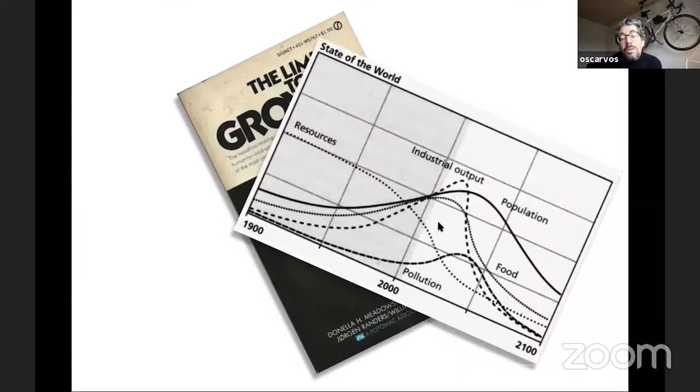Because we need to act, and we know it - we've known it for a while. The Limits to Growth - maybe people haven't fully read it, but know of the Club of Rome and this publication and their forecast. Not a truth, but a forecast of what will happen if we continue living like we do.

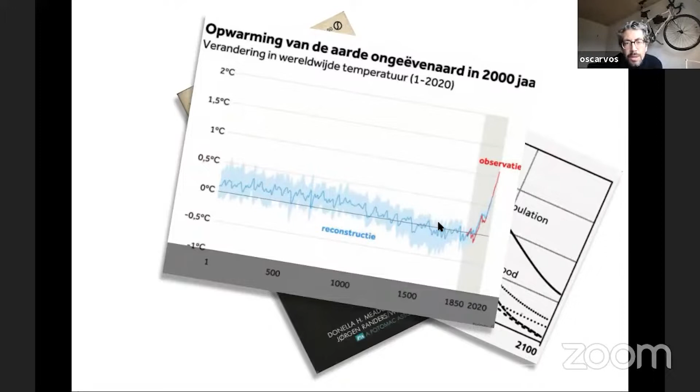By now we know better than before how urgent it is that we start transforming our way of living, our society. But at the same time - that's the climate part - there's a huge pressure, not only in Amsterdam but on a global scale, on inclusiveness in cities and affordable housing in general. So the right to dwell is important, and again we see in Amsterdam families moving out of the city, which is ultimately bad for the city and the municipality as a whole.

I'll get back to that later. This is a very important start to the lecture, but I want to move on with an introduction about me and about our office. It's not just about me - my office shapes who I am and what we do together.

I'll go quickly since there are many slides, but I really want to show you our first project, Dutch Mountain, where we had a huge ambition on sustainability - still getting to learn what that would mean for us.

We used local materials - here you see the local wood from het Goois Natuurreservaat. We built an energy neutral house, half underground; you can see the solar panels. But still, of course, there's a lot of concrete in it. You could say that's key because we were building underground - fair enough, but it still itches a little.

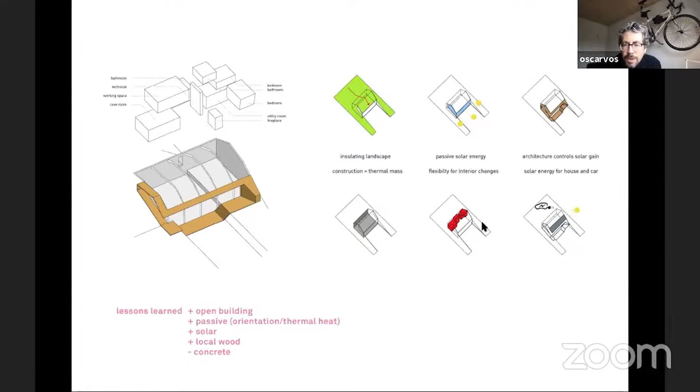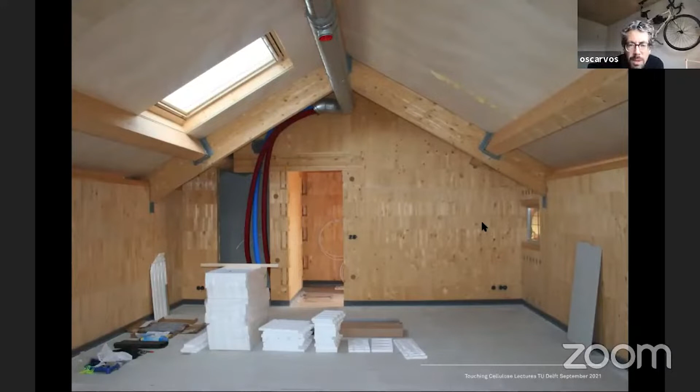So we moved on, researching what kind of structural materials or structural timber you could use for building houses. This is my first encounter with Steko. It's an artist house close to Belgium. We built it. It's a beautiful material.

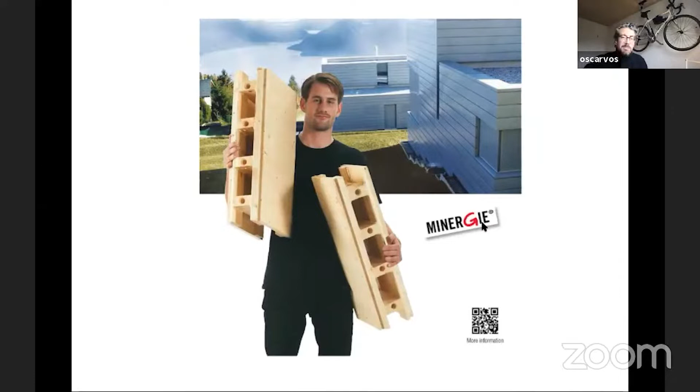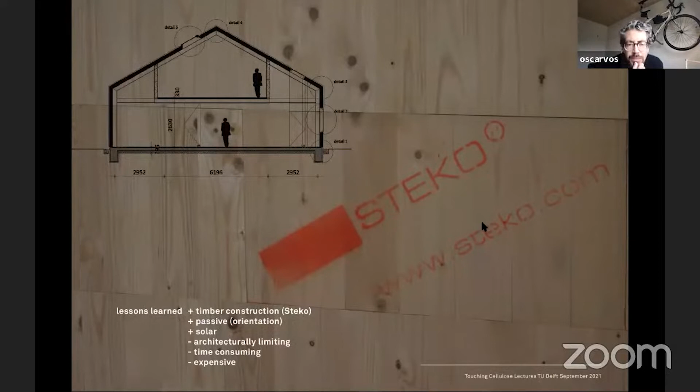You can by hand stack modules, but it's still learning by doing. It's limiting in its architectural manner, it's time consuming, it's expensive, but it is a timber structure.

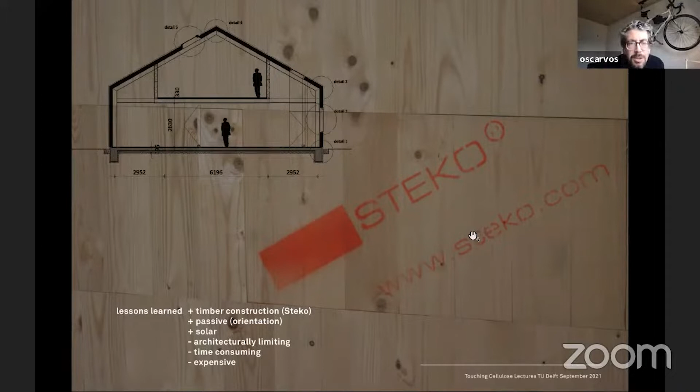So that was the next goal for us, trying to be as sustainable as possible in that sense. We try to do that in our public buildings. That's a big challenge, still lying ahead of us. Introducing as much timber as possible, yes, but there are still structural and sound demands which end up being a huge challenge. We keep on learning by doing, but we want to do better.

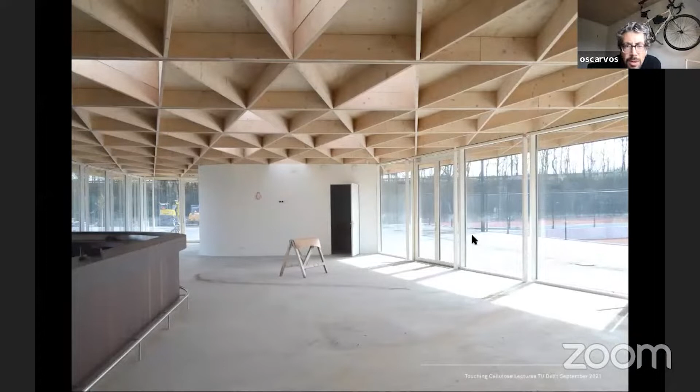But we try to introduce timber in different ways as much as possible, LVL kind of structures, and where the biggest impact is - I will get to that later - is in housing, since that is a bigger part of our construction in the Netherlands. So if you want to go for impact, you should do that through housing.

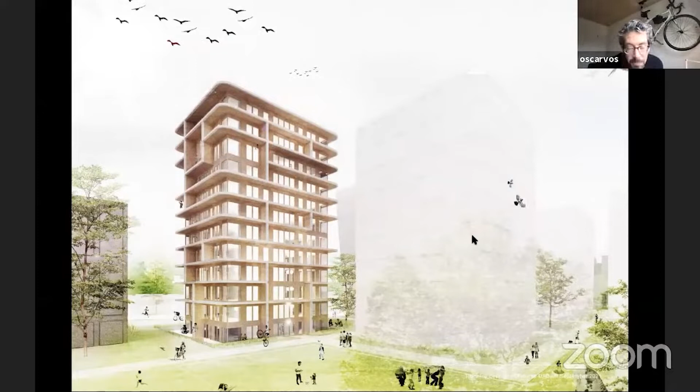This is a project which is still not built. It's a very complex procedure, but the design is finished. It's a building in Westerpark West. It's 12 layers, where we call it a sort of Tetris game, as you maybe saw here.

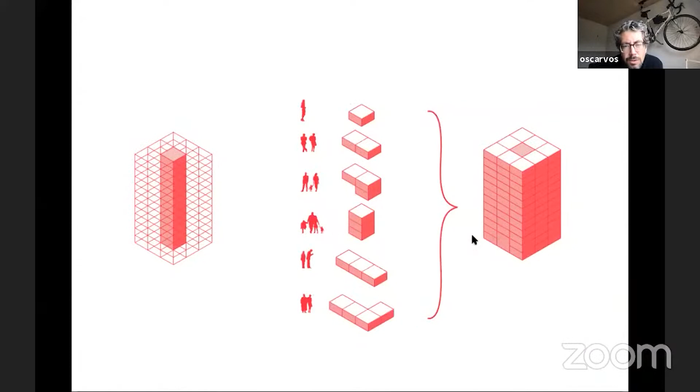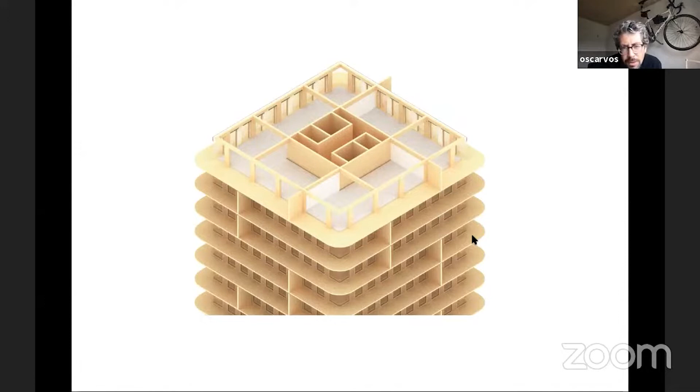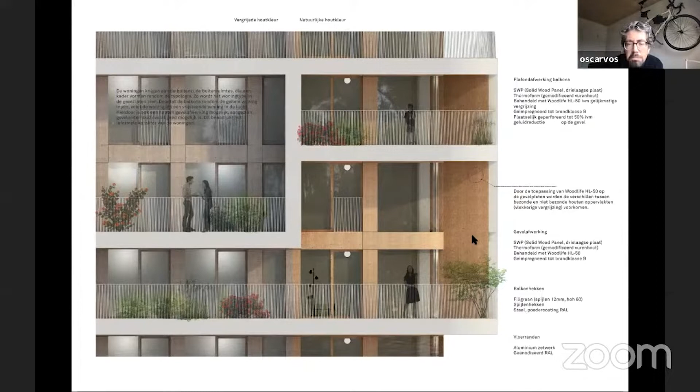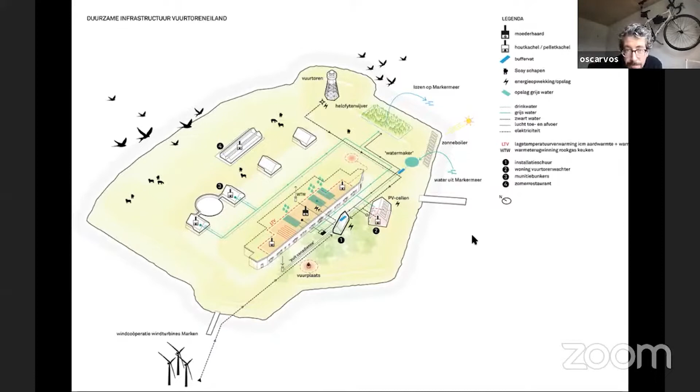We did a project in Amsterdam, Vuurtoreneiland, just to show you what you can do with wood. Yes, I'm going through this, but it's an amazing project. We actually took up the whole island in a new energy system, which you can't see anymore.

Going through it, I would recommend you going by boat to the restaurant any day. It's beautiful.

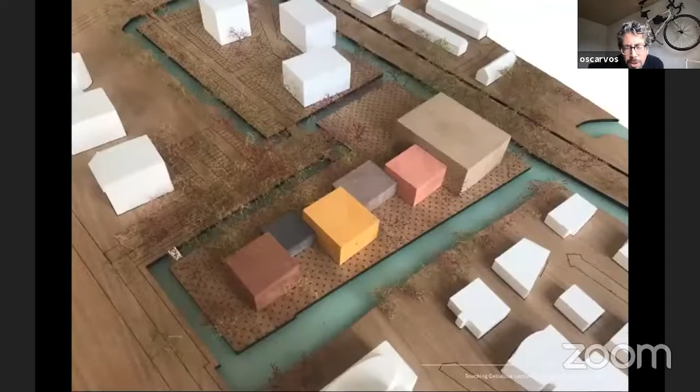A project we're working on - it's a school just above Amsterdam. It's a school for kids who have several different learning problems, physical as well as mental. So it's an important building for us, and everybody agrees that it should be built in wood, since that is the best way of creating an environment where they can be at ease and be themselves.

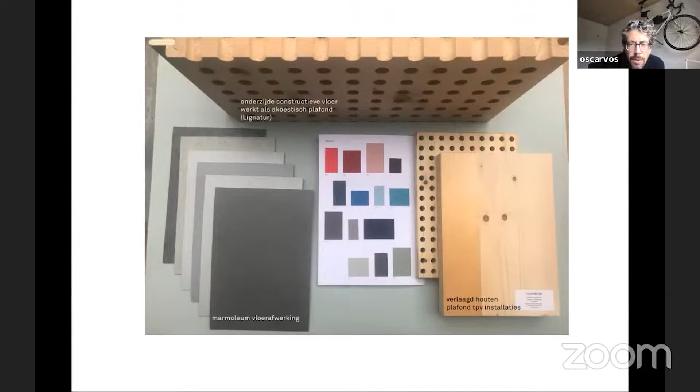So we've researched it - it's a combination of different timber structures. This is Lignatur, a Swiss company actually, the only company which has this product. It's a beautiful product where you can integrate everything, every demand you have, every performance you want a floor to achieve, where acoustics is really important - you see the Schallschutz.

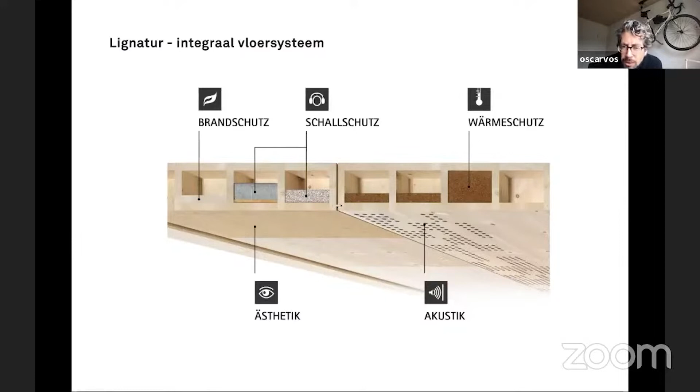You need mass in a floor to achieve that acoustic performance. So you could put it on top, but why not integrate it in this hollow structure? You can also integrate acoustical elements. So if you don't have a lot of duct work, for example, you can use those floors.

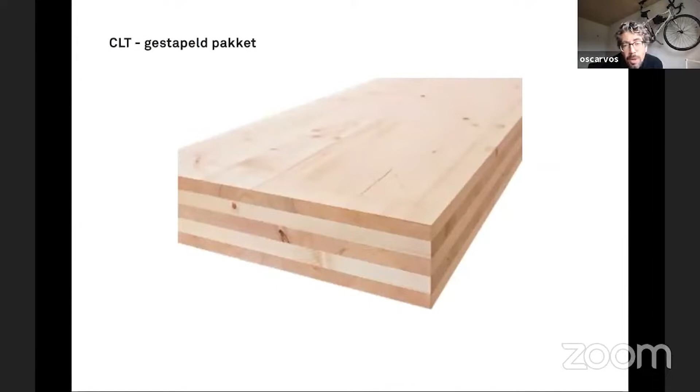But otherwise, we use CLT in other parts of the building, which everybody knows the term. It's funny to show, but it's going around so people may have seen it - it's amazing to know that the concept of CLT was actually patented in 1923, by Frank J. Walsh and Robert L. Watts. The thing was they didn't have the production techniques to scale it up properly, but the structural concept was there.

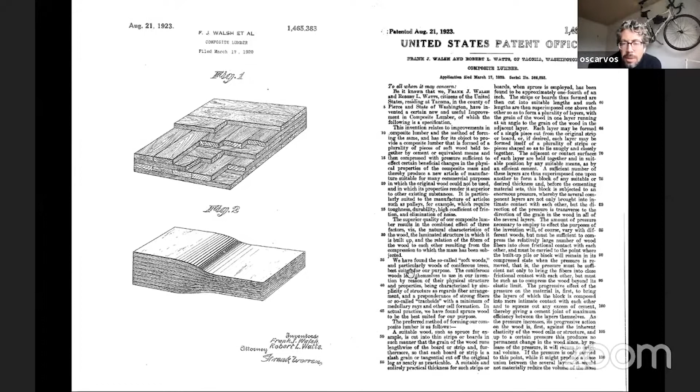We are happily now in an era where we can and we are scaling up, and it teaches us different ways of using a material. Every building, roughly every typology, could make use of different ways of structural detailing. So these are prefabricated - I call them double T elements. The KLH, a company, makes ribs.

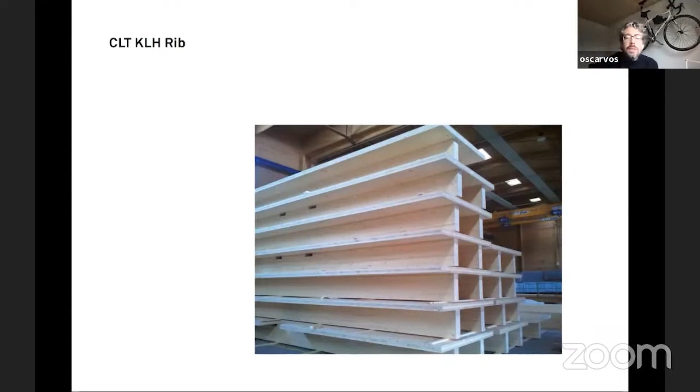In some cases, these are amazing products to use if you have big spans, but then again, they're also quite high, so you need enough floor height space. The same goes for LVL beams, they're structurally amazing, but you need height, though they're very slim.

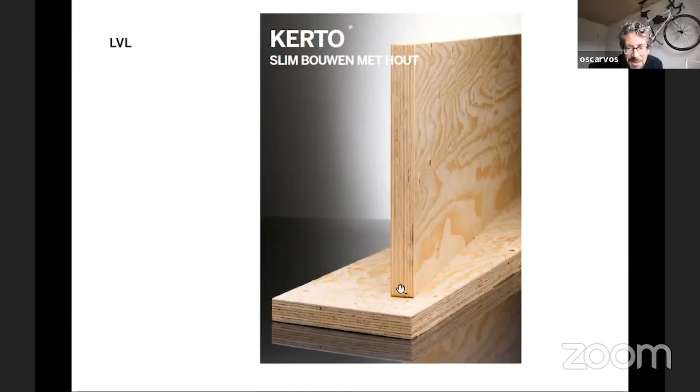I'm just showing you what our learning curve was, you need to research all the different opportunities timber has. The bigger part we probably know by now, but it's still not common enough, so I also see it as a sort of mission to tell everybody what the opportunities are, and to learn from others, of course.

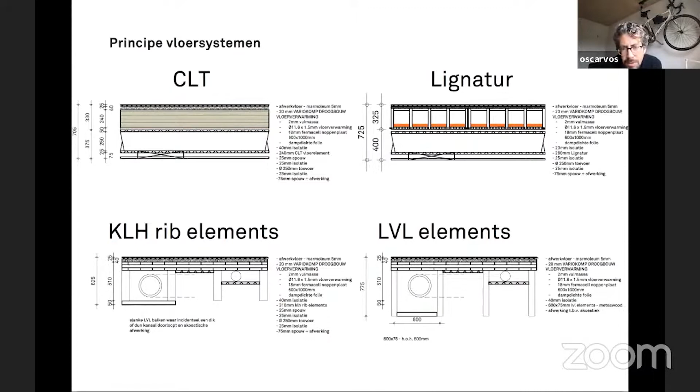We put different typologies next to each other with their pros and cons, that's what we do in every project. And funny enough, I noticed that in our practice we communicate more. Structural engineers are key, of course, but we communicate basically more with the suppliers, or the structural engineers of the suppliers, to have a very quick feedback loop on designing, and it's very learningful for us as an office and for myself.

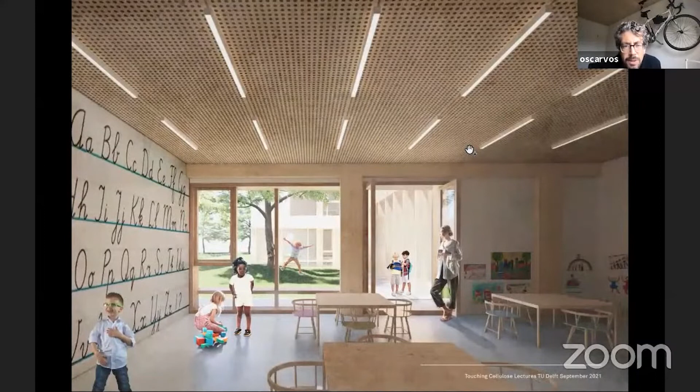And in the Speelleerplein, as we call it in the Netherlands, it's a sort of Swedish model, I shouldn't dive into that too deep, where kids can play and learn together. So you create a space which is challenging to move and to learn at the same time, really combining those things.

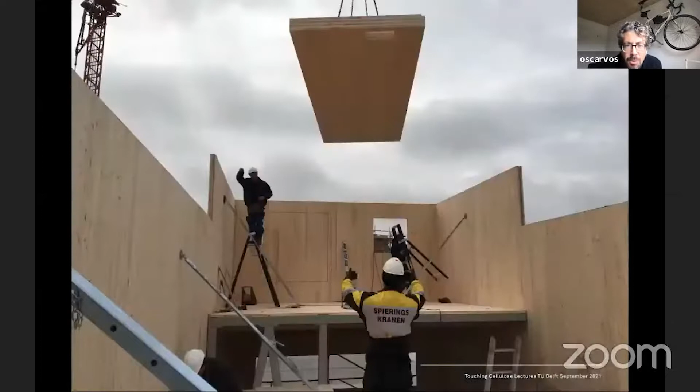I move over shortly to my own house, where, because a few years ago we hadn't built with CLT yet, I needed an experiment. So I did the experiment on myself.

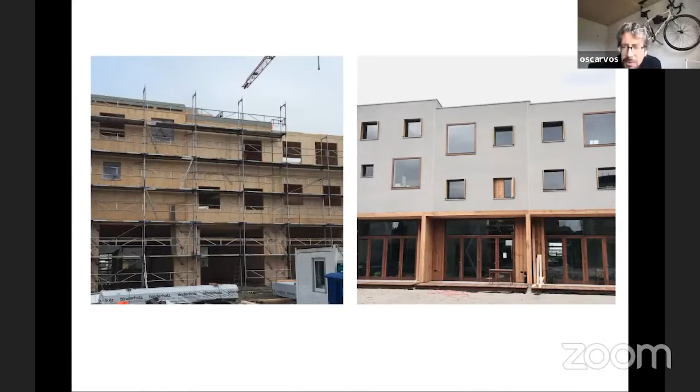Built with a few families a co-housing project in the northern part of Amsterdam, where I also wanted to challenge myself and my neighbors to create affordable CLT houses, although spatially inefficient, but basically pretty affordable. That means you have to design listening to the material.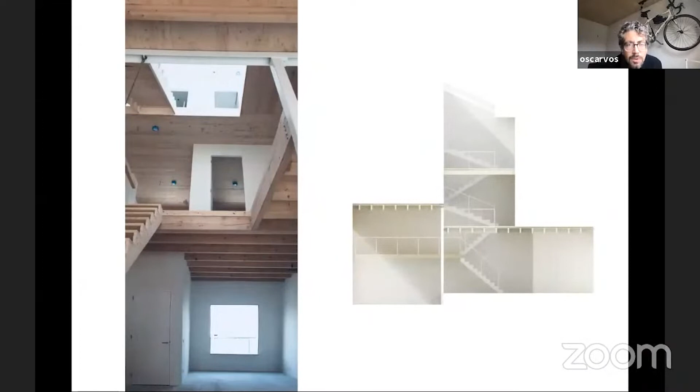Then again, if you need some proper space, you sometimes introduce some steel, but just to show you there are projects enough, of course, which is growing the amount of projects using structural timber in a new, productive way.

And it's easy done. These were my two daughters, sorry for showing this, but we enjoy playing kapla, and actually it's really inspiring playing with that. You should do it sometimes.

So I move on to another project, which is very new, very fresh for us. It's a really tiny project, 100 square meters, on a very special small island just above Amsterdam. The cool thing is, because it was on an island, we had to challenge ourselves to build very light, very smart. So it's 100% wooden, well, HSB as well as some CLT combined house, which could be transferred on a small boat over the water.

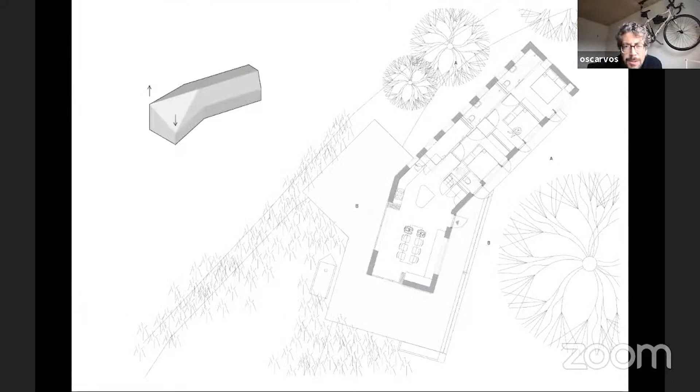You see, it's totally, the roof as well is totally covered with this durable wood.

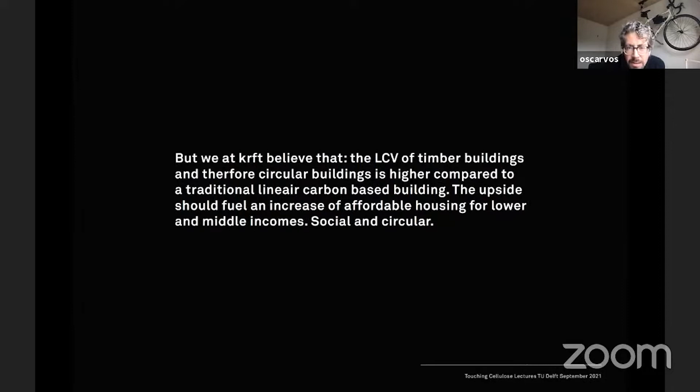Creates a beautiful place. But again, going back to the main theme about the fact that timber buildings and the upside of the life cycle value should go into something valuable, namely affordable housing.

So I want to move on to talking about a case study research, Social Circular, we are doing with IGG Bouweconomie, a building economics and building cost calculation office, and Copper 8, specialized in circular business cases and circular economy.

Jordi van Laar at IGG is an amazing guy who knows everything on circular business cases. To give you a more detailed list of urgencies important in this research, we really want to focus on the Netherlands and on the shortage of affordable housing, and really want to show, talk or debate on the fact that we should get rid of the cradle to grave mentality in housing specifically, but also align with the national agendas for the grondstoffenakkoord, the resources, climate, and transition agenda.

There is an agenda moving from linear to circular. We want to achieve 100% circular building economy by 2050, which is a serious ambition, but yeah, it should be possible.

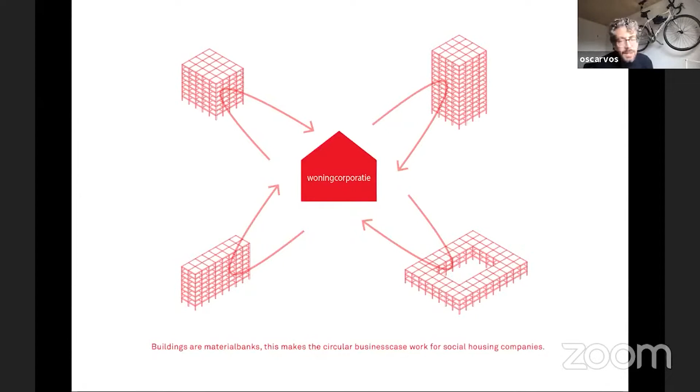Social housing companies own and keep owning the building itself for the total lifespan. And therefore you see happening that social housing companies are really interested and keen on transforming their business case. It's difficult since they have a lot of property which isn't circular. So it's a huge challenge, but everybody can see that the business case makes sense. We'll get back to the business case later. It's maybe not about designing, but a good architect, I think, is also very aware of the business case.

We say that for us, making a circular building also starts with some design principles, which is, of course, the Stewart Brand approach of having the 6 layers, which have different life cycles. Take the site, it's the longest one, and you can imagine all the other ones have different life cycles. I'll get back in the scheme on that later on.

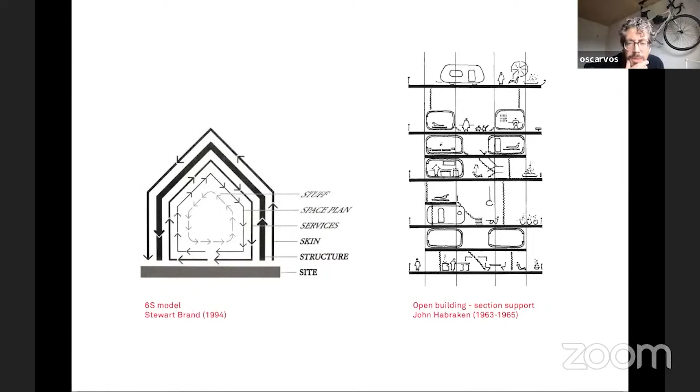Overall, in our whole office, we are very aware of the opportunities which open buildings have. It might not always make sense, but in general, actually, definitely it makes sense. Even the debate on, okay, does it make sense in housing itself? Because those houses tend to change hardly.

It does make sense, of course, to make a structure which is open and adaptive anyway. And what I told, we start always by checking, can we build with timber? Let's make it simple. If not, can we work with materials which are reusable? If not, can we work with recycled materials? This is as if it were such a simple step-by-step thing, but to give you a short insight on how we try to achieve the best or the lowest footprint and how to start in a project.

So this is the Stewart Brand scheme made concrete in 50 years. It's not a lifespan. Well, let's call it a 50-year lifespan. It's a bit of a traditional approach to 50 years, but anyway. And you can see that, in general, looking to the business case, you say, okay, the site is endless in that sense.

So it's the 50 years, as well as the structure. But it starts with the skin, where you say, okay, so I'm talking about the cladding or the outer layer of a building, which has to endure quite some things. It might need maintenance or changing elements after an update after 25 years. So halfway through, could be earlier, could be later, but this is a principal scheme.

And if you talk about the services, it's slightly more often. Now, spatially, it's about the function. So function changes. That's where the adaptivity of a building is key. Might occur way more or way less than what's happening here. And the stuff in it is separated really from the building, of course.

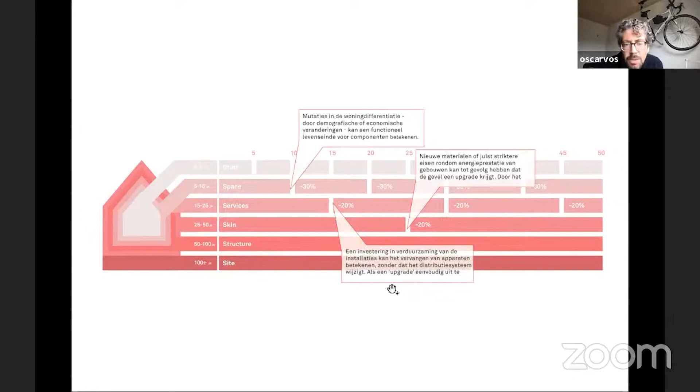Well, that's the same as this for skin and services, just to give you an example. So I think I have to be aware of the time. I think we have until 9:30.

The case study is on, these are two social housing blocks, and we call it framed as a concept. So we work from a spatial framework, which is exploded, shown here, so the demountability, the losmaakbaarheid, as we say, is a beautiful Dutch word, is shown by elements. And it's specifically important to imagine having this strategy in social housing, because they could change over to other projects.

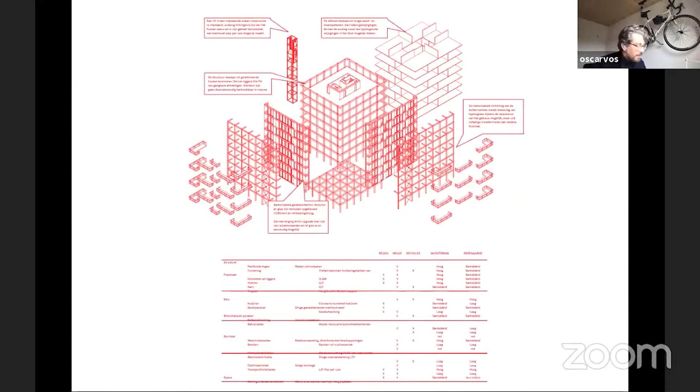And they could store it, but they could also just change out different materials throughout different projects, which makes it one big ecosystem in itself. Then by design, making it smart means adaptable, which means as free as possible floor plan.

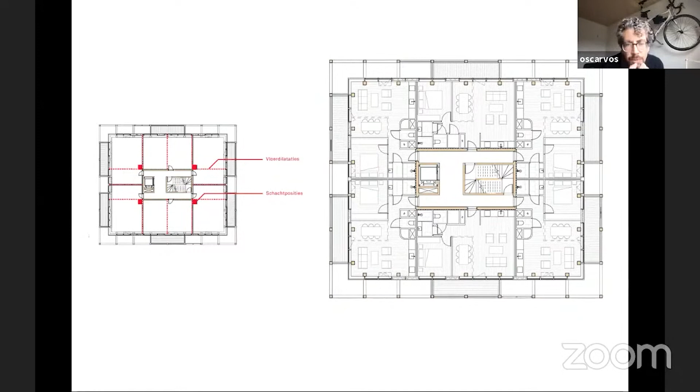Which is difficult because you have small scale houses. So you have to be aware of different possible sizes of elements. And you need to be sure that in your main structure, that's already a given, that you don't have to make big changes in your structure by achieving that. Pure logics, but anyway, I'm telling.

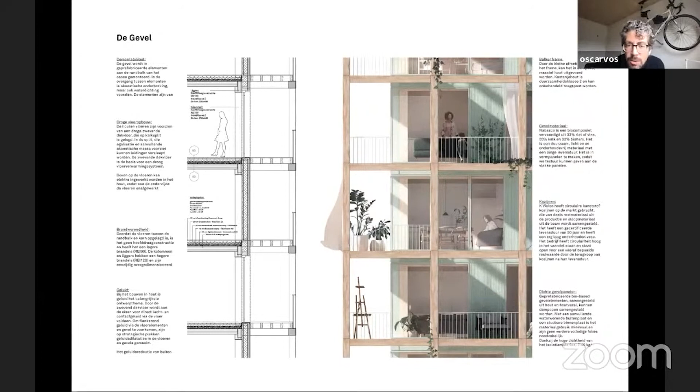And to get to the digits, Jordi van Laar made this based on the case we did. You have to start with realizing that if you make a proper circular building, then you have to be aware that the separate elements or modules need a certain rest value the moment you have to update it. So if a facade element needs updating because performance needs to be better, for example, it should have been designed in a way that it could be taken off in different elements.

The beauty of timber structure, which is why we try to align those things, is that in general it's easy and makes sense to have dry connections anyway, which makes remountability easy. But you can also assign different rest values to different elements.

If you start calculating a model over a certain lifespan, what we try to show, without going too deep into it, is over a 50-year lifespan, what is the value of the real estate? It's important because investors are also now starting to realize that if we build something now, we need to be aware of its value in 50 years, and thus we have to build a circular building.

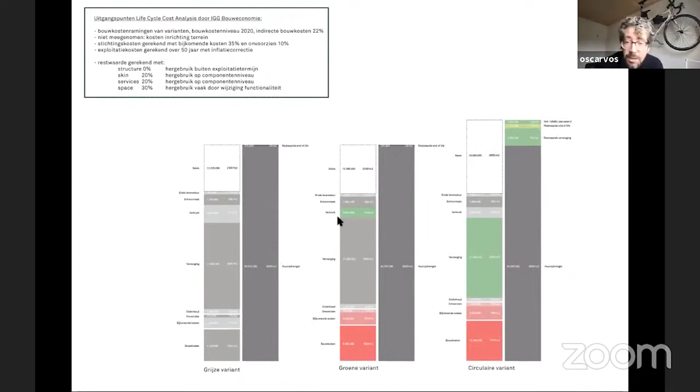That's the narrative we want to tell, because if you see this graphic, it shows the traditional concrete-based building in gray, which might make sense in the beginning. It's the challenge we always have as architects, trying to prove that the initial investment is not key for a proper long-term business case, because every jump in this graph means a certain life cycle of a certain element, and if it loses value over time, you lose value in your property. But if the elements you update keep a rest value, the overall value of your building relatively grows, so you also lose less money in the building.

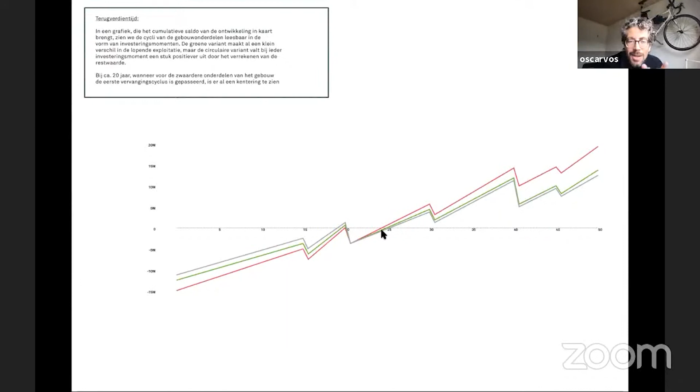A beautiful example is the city of Rotterdam, which is already acting on this. They have buildings which are circular enough, and their conclusion after a few years is that they have less maintenance costs, and therefore they say, okay, then the rents should go down too. That's where I want to go towards - if the business case is smart and everybody's happy and everybody earns enough, then affordability could also be a goal to achieve.

We're moving forward with this research now, so you will be hearing more of that.

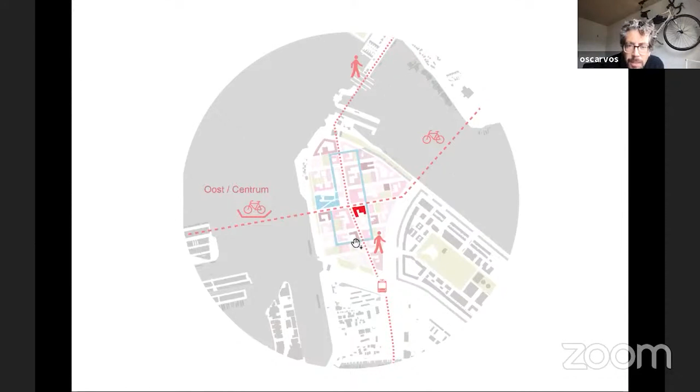In general, it's a stack of 8 blocks to create a smaller korrel, a smaller block, which fits in a more inclusive city. Here's an image from the water side.

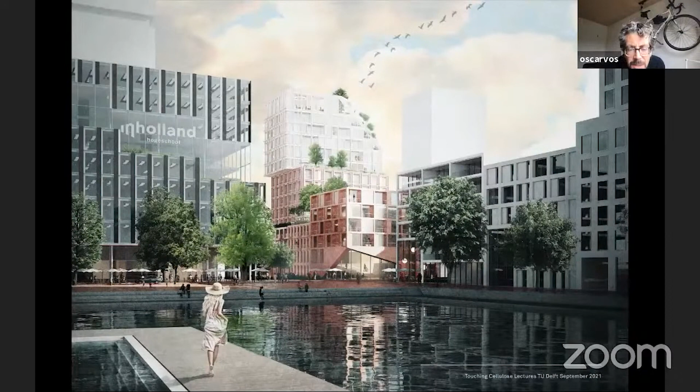It's a very multi-use building. On the ground floor there's a commercial space, a supermarket. We make a huge ramp which goes up to the first floor, which has a huge amount of space for cycling - in this neighborhood, foot and cycling are the key ways of mobility. We see co-working, sports space, and the rest is housing. This shows the basic principle of the whole building.

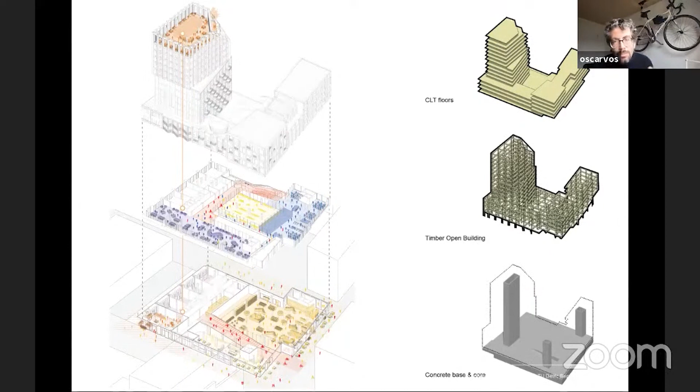Yes, we still have a concrete basement. We assume concrete for now, because we need a realistic business case, but we are researching it, and we see this open building with a huge framework, as I told earlier - so those lessons we want to really put into this building - and mass timber floors.

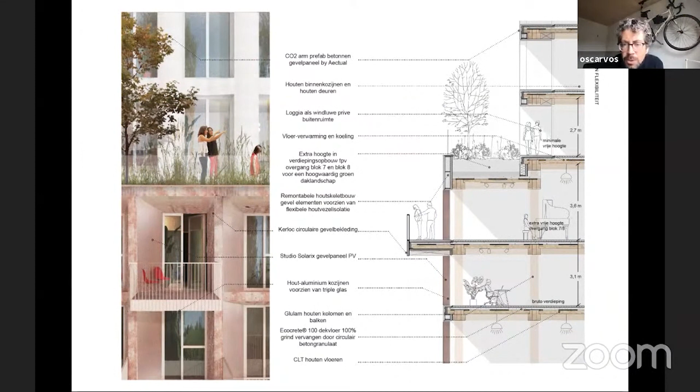In detail, what you see happening here is challenging, because we also need to keep biodiversity into account. So we need to create buildings which can carry a lot of water and soil, because we want to have this biodiversity in the city as much as possible. So, enough challenges to achieve.

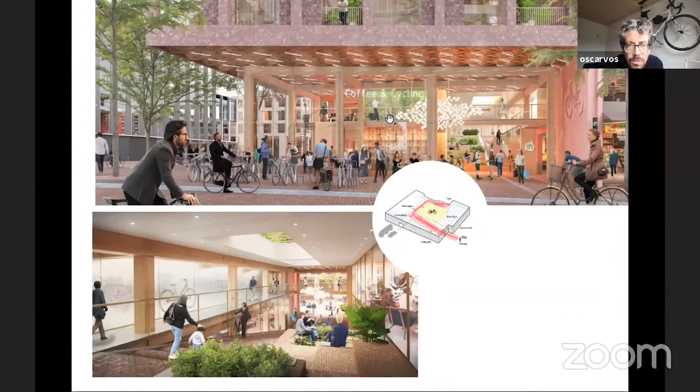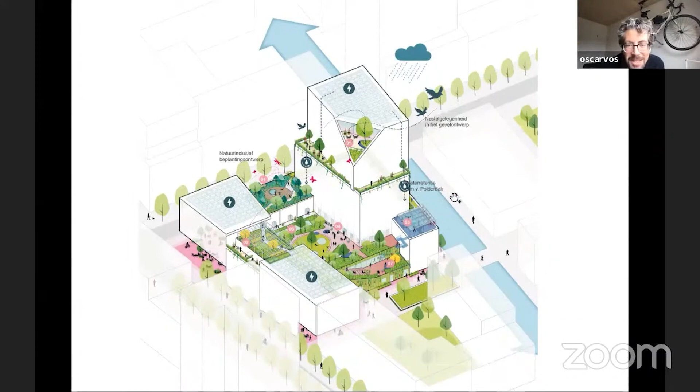We see here the entrance, showing that people can walk up with their bikes. You see here the wooden main structure, and that closes off with this beautiful image of Sant & Co, showing that every space we can use, we want to and need to make climate adaptive in that sense. Still having too many solar panels if you ask me, but it's needed because it's an energy productive building. That was my last slide.